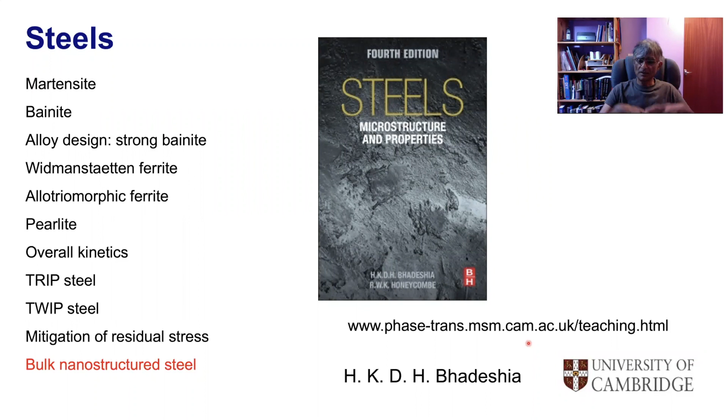This last lecture in this series of 12 deals with the design of a bulk nanostructured steel. I'll explain what that actually means. The problem is to design a bulk nanocrystalline steel which has a basket of good mechanical properties: strong, tough, and cheap enough to make massive objects.

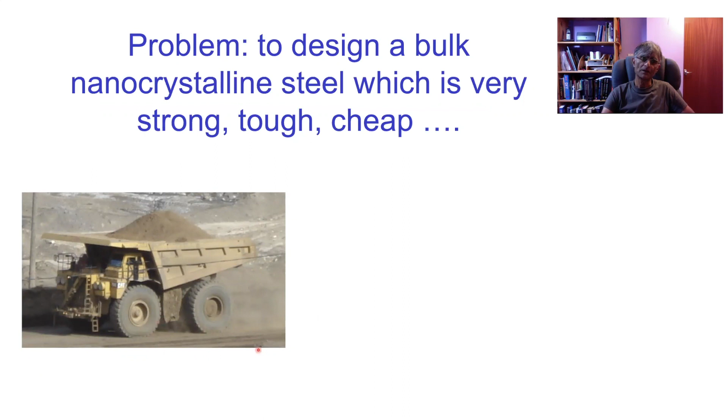By massive objects, I mean, for example, this truck, which I photographed in the oil sands mines in Alberta. If you look at the size of just the wheel, compare with, for example, my size or that of my colleagues, we are talking about very large structures which are large in all three dimensions.

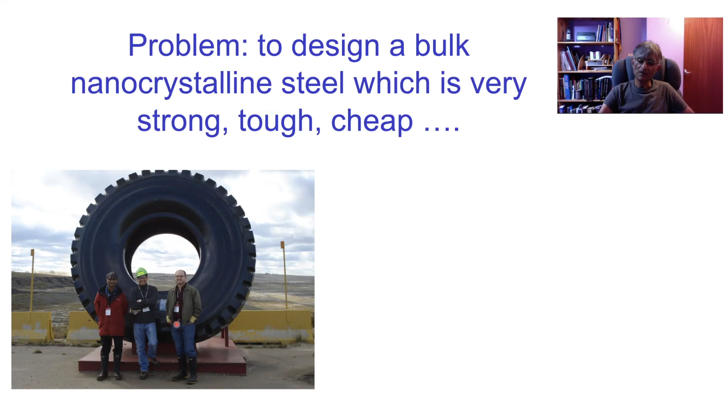Now, what do we mean by nanostructured? We want something that has a structural scale, a length scale comparable to carbon nanotubes. And what do we mean by cheap?

We must be able to produce this material at the same price as bottled water, whether we consider weight or volume, it doesn't matter. This has to be one of the most wasteful purchases anyone can make, because you're collecting water from somewhere, putting it into a plastic bottle, and transporting it from its site to all over the country in lorries. Makes no sense at all when you can get perfectly good water out of the tap in most circumstances. Anyway, that's by the way. We're after making steel which is as cheap as bottled water, because bottled water seems to be affordable.

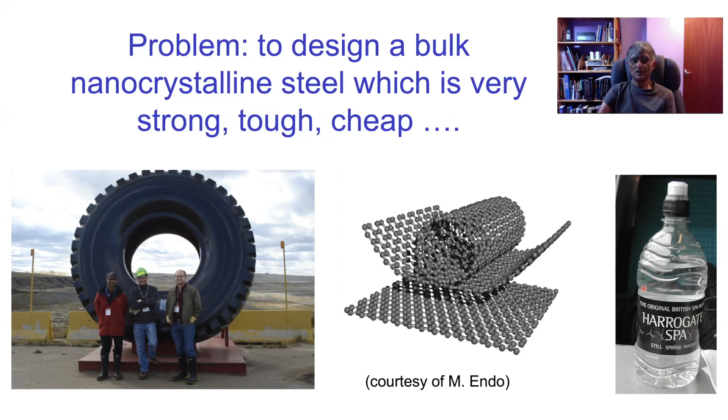Let's think about what nanostructure actually means. If I measure the grain size using a mean linear intercept, then, recalling the lecture on pearlite, the amount of surface per unit volume is equal to 2 divided by the mean linear intercept. So this plots the amount of surface per unit volume, in nanometers to the -1. A value around here corresponds to about 100 million square meters of interface in 1 cubic meter of material.

Notice that at first, the amount of surface per unit volume doesn't change very rapidly, but around 20 nanometers, it starts to rise sharply.

This trend is also reflected in mechanical properties. If you look, 20 nanometers corresponds to around 0.1 in terms of surface per unit volume here. So if I look at the strength, any grain size smaller than 20 nanometers does lead to an increase in strength, but it's not as sharp an increase as when we go from a large grain size to about 20 nanometers. So let's define our nanostructure as something having a mean linear intercept of the order of 20 nanometers. If it is greater than that, we expect to see sharp decreases in strength levels.

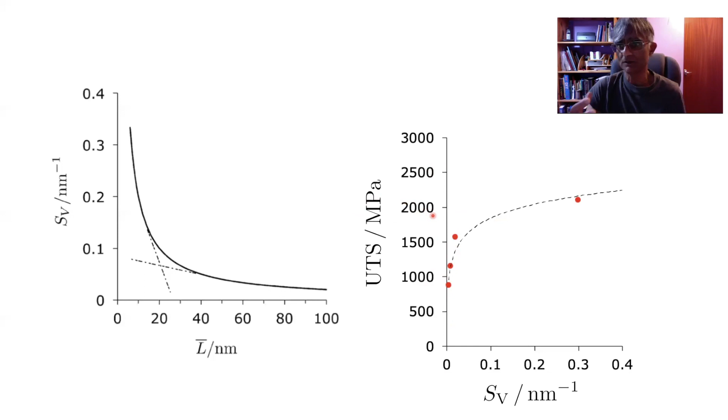Now, we're already talking about very large numbers. So 2,000 megapascals is 2 gigapascals, and it's hard to grasp the meaning of these very large values of strength. I'm going to illustrate what that means.

An apple has a weight of approximately 1 Newton. A Newton is a force, and a weight is a force. So if you put an apple on 1 square meter, you're experiencing on this square meter a stress of 1 Pascal. So 1 gigapascal means this is able to support the weight of 1,000 million apples.

Incredible, really. So we sort of glibly talk about strengths of 100 megapascals, 1 gigapascal, 2 gigapascals. But when you think about it, those are incredibly high strengths, and that's what makes steel a very, very useful material.

Back in 1956, a strength of the order of 14 gigapascals was already achieved, in pure iron. These data come from single crystals of pure iron, and this gives you the size of those single crystals.

You can see there is a dramatic decrease in strength as the size increases. This is because, if you make your crystal small enough, it's hard to find defects in it, and defects tend to reduce the strength. By defects in this context, I mean, for example, dislocations. Once you have enough dislocations in your structure, the plastic flow stress becomes a lot less than the ideal strength of the crystal, which involves ripping apart layers of atoms.

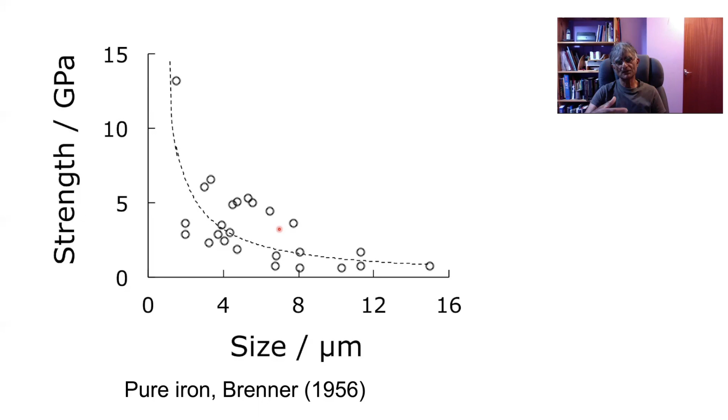Of course, there is another way of creating strong steel, and that is by severe deformation. This is a steel wire with a strength of 5.5 gigapascals, available commercially. You can see it's extremely ductile, and it can even be tied into a knot. That's better than, for example, a carbon fiber, which doesn't have this level of ductility.

The problem is that to get this level of strength, you've got to deform it so severely that there is a very large dislocation density in the material, and the coherent regions inside this wire are very small indeed. To get that level of strength, imagine you've got 60 grams of iron and you stretch it out into 2 kilometers - that's the level of deformation put into this wire by drawing.

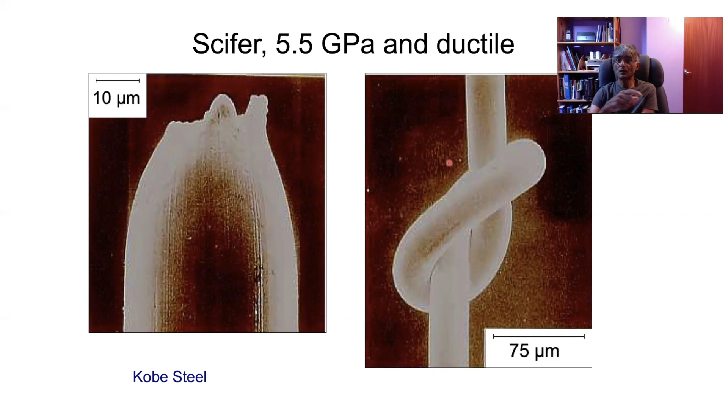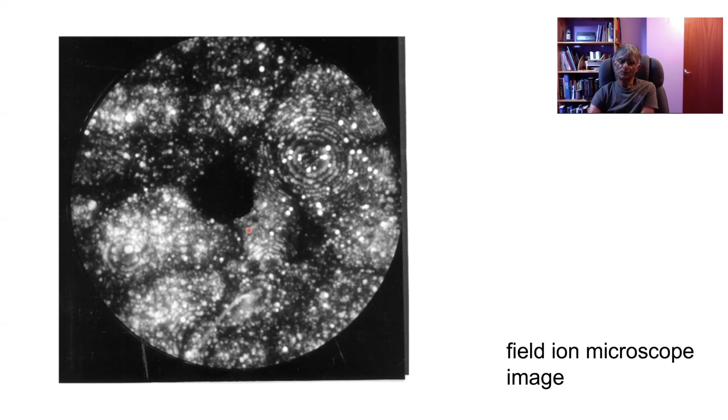So we've got to 5.5 gigapascals, which is 5.5 billion apples on 1 square meter - really astonishing strength. Now, if I compare this wire against the single crystal where the strength drops dramatically, this wire is insensitive to size simply because it acquires its strength not through perfection, but by having lots and lots of dislocations inside the material.

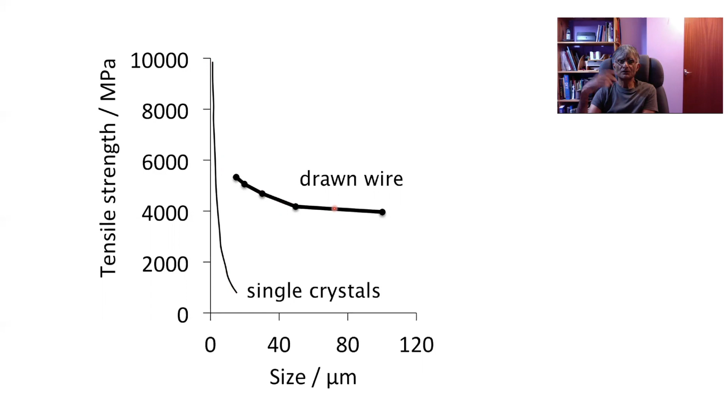The problem is that when you have to put in so much deformation, you end up with an extremely thin wire. To illustrate how thin that is, if you look at men's socks or women's stockings, the definition of that thread is in terms of a denier, where a denier is the weight in grams of 9 kilometers of fiber. Women's stockings tend to be about 10 denier and men's socks about 50 denier.

Now, the steel wire I just explained is 9 denier, so it's finer than the thread in women's stockings. This means it becomes very expensive, and it cannot be classified as a bulk material because you can't make large objects with it. You can't weld it either, because that would destroy the structure.

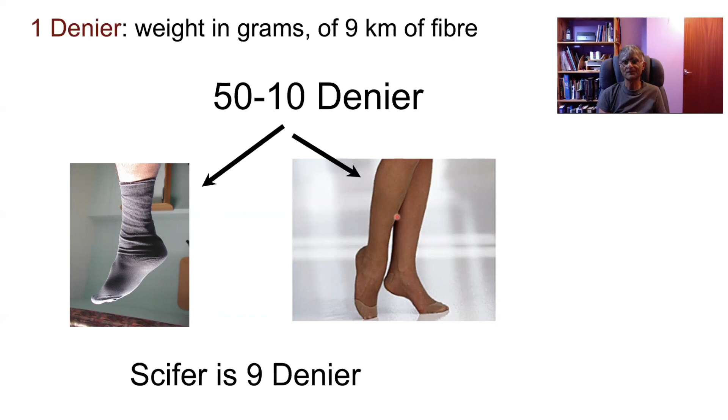Let's move on. This is a carbon nanotube with a particle of iron in it. When this became a story, there were articles, for example in Acta Astronautica, where the strength was reported as 130 gigapascals, which corresponds to the strength of the carbon-carbon bond.

In recent years, people have been talking about graphene being the strongest, but actually you could get a strength of 130 gigapascals in carbon nanotubes. The reported strength of graphene is of this order, or very close to this number.

The reason this was reported in Acta Astronautica is that the idea was to build a space elevator with a carbon nanotube rope that is 100,000 kilometers long. Because it would be light compared with any other material we know, it could support its own weight, whereas if you tried to make it out of steel, that would not be possible.

It also has a modulus along its length which is roughly 6 times that of steel, so that's very good for a rope.

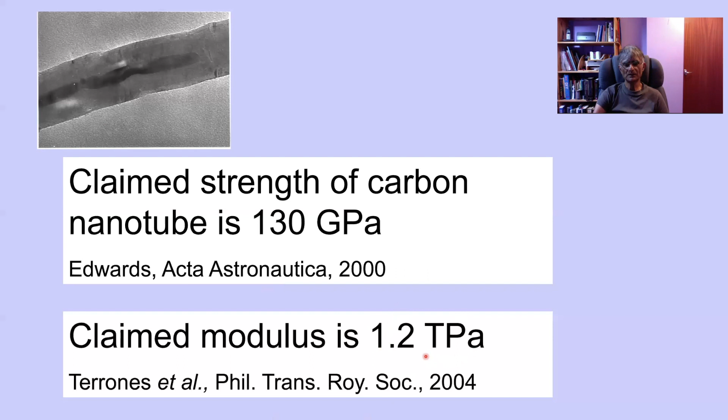If we look at some basic thermodynamics of defects, this term here, where we have small n, is the number of defects, and this is the cost of creating a defect - this opposes the formation of a defect. On the other hand, when you take a perfect crystal and introduce a defect, that increases the number of ways in which you can arrange the defect on the lattice, and therefore you increase the entropy - this is the configurational entropy, and this term will favor the formation of a defect.

So if you differentiate this equation with respect to the number of defects and set that to 0, then we get an equilibrium number of defects - and I emphasize the word equilibrium - at any temperature and in any material.

That equilibrium number scales with the total number of atoms in your system. So what this means is that once you start scaling up the size of your object, you will have an increasing number of defects in that object. That's what thermodynamics tells you. You can't get rid of them.

This is why we can get diffusion of atoms through a metal, for example, because there are vacancies, and the vacancy concentration—if you set this to the free energy of formation of a vacancy—represents the concentration of vacancies. Now, this equation tells you immediately why you cannot get the strength levels reported for carbon nanotubes when you make them larger.

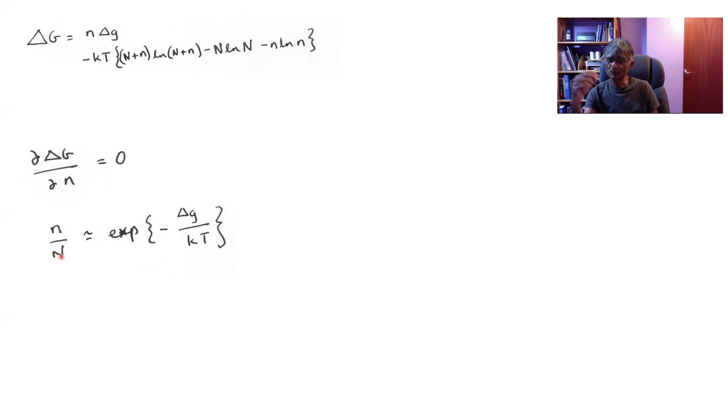So if I show you some data here, the strength collapses, okay? Collapses even when you get to a length of 100 micrometers, let alone 100,000 kilometers.

And exactly the same principle applies to graphene. It's complete nonsense to talk about the strength of graphene being 200 times stronger than steel. It's only 200 times stronger, as are carbon nanotubes, when the size is incredibly small, okay? Because you are relying on the carbon-carbon bond, not on defects, and defects will be there as soon as you scale it out, okay? And of course, the strength of graphene and of carbon nanotubes is highly anisotropic.

So the same reason which we knew in 1956 is that the strength of whiskers decreases with size. That should have been a lesson for people working on carbon nanotubes and graphene when they talked nonsense about the strength of the material and what could be made with it.

So the strength of a nanotube rope, about 2 millimeters long, is less than 2000 megapascals. So I wrote this up and sent this article to NASA, who were sponsoring a $17 million project on the space elevator. And you no longer hear about the space elevator being made of carbon nanotubes or anything else for that matter.

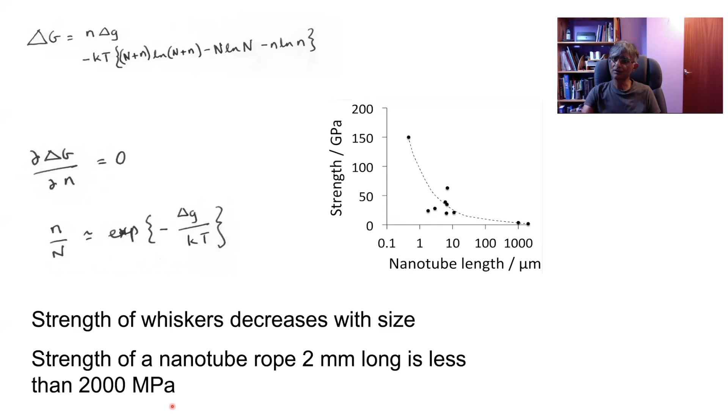Actually, the idea for the space elevator comes from Russia, a Russian comic from many, many decades ago. Very imaginative—yeah, you don't have to launch rockets, you can simply climb up the rope.

So strength produced by deformation limits the shape, and the shape may be in the form of wires or very thin sheets because you have to deform a lot. And strength in small particles relies on perfection and is doomed as size increases. We've known that for more than half a century, and yet people just do not learn that lesson when they make awful claims about the properties of small samples.

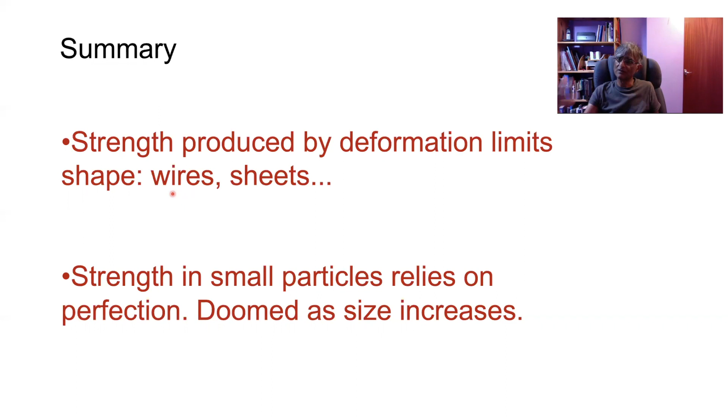Now, there is a process which has been incredibly successful in mass producing steels. It's known as thermomechanical processing, where the steel is hot deformed in the presence of very small particles of carbides, which limit the growth of the austenite grains, and therefore you can end up with very fine ferrite grains.

So let's see if that process, which definitely is a bulk production process and produces steel samples which are very, very large if you want them to be large, and ask: what is the smallest size that could be produced by thermomechanical processing?

This is a grain structure, and I explained to you in an earlier lecture on pearlite that the cost of creating these boundaries is the surface per unit volume times the interfacial energy, a grain boundary energy in this case. So if I multiply these two, I get 2 sigma over the mean linear intercept as the cost of creating these grain boundaries. And that cost has to come from somewhere, okay? It's provided by the free energy change from austenite to ferrite.

So we can calculate the free energy change using thermodynamics and set it equal to this. And then we have a relationship between the smallest possible grain size that can be produced for a given driving force of transformation—in other words, a given undercooling below the equilibrium temperature.

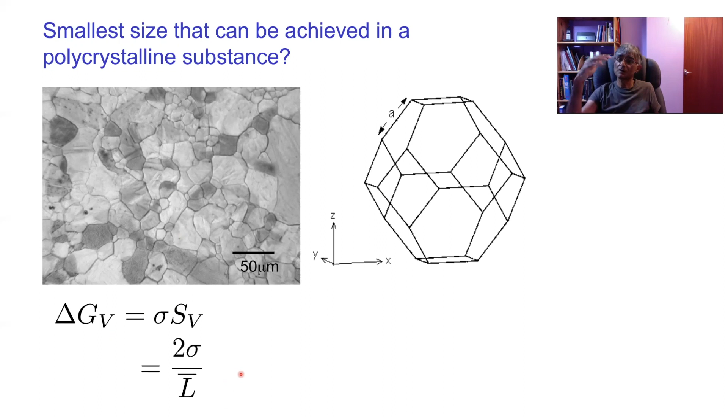So here is the curve showing how the minimum size that could be produced depends on the free energy change. We would have to undercool to get a size of 0.01 micrometer, which would be very impressive. But it turns out that a large amount of investment to look at this problem never managed to produce a ferrite grain size smaller than 1 micrometer.

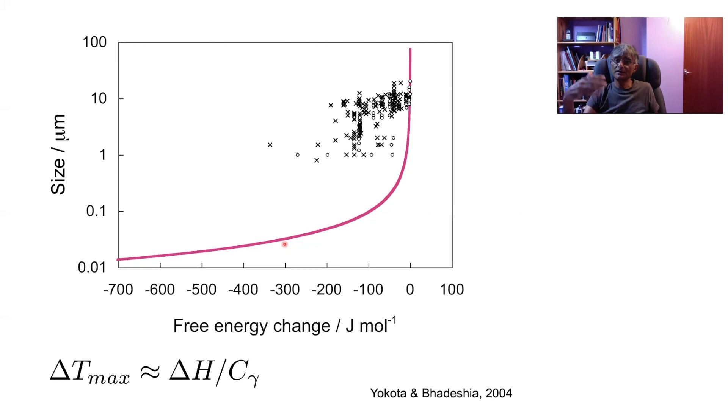Now, the reason for this is that when we undercool, the enthalpy change of transformation also increases. And furthermore, the rates of reactions can sometimes increase. So the heat of transformation basically removes the undercooling—it heats up the steel. And when we take account of that, it isn't very likely that we can produce nanostructured steels using the hot deformation method.

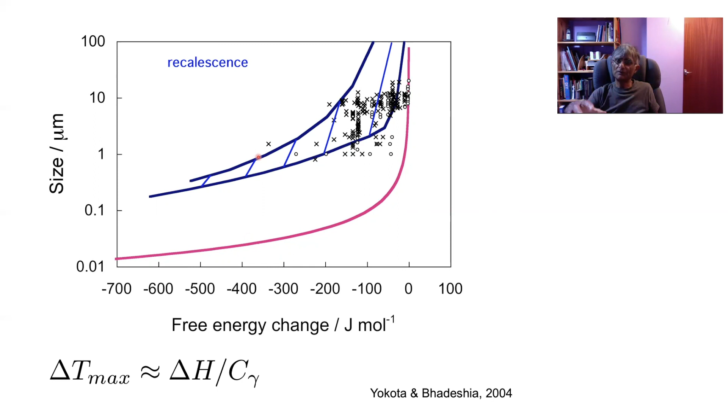This enthalpy release is known as recalescence. It heats up your material simply from the enthalpy change of transformation. So in summary, thermomechanical processing is limited by this recalescence, the release of the enthalpy of transformation. So we need to do something to help. We need some mechanism of storing the heat inside the material.

Think about it, when we were talking about displacive transformations, the amount of stored energy due to the shape deformation in the case of martensite was 700 joules per mole, which is very large. If I go back to the previous slide, you can see that's a large amount of energy you would consume in creating the elastic strains around martensite.

We could also reduce the rate of transformation to allow any enthalpy to dissipate. And transforming at a low temperature is always a good thing because it increases the nucleation rate. I mean, that's an exaggerated statement because if you go too low, you might actually decrease the nucleation rate. But generally speaking, you will get finer structures when you transform at a lower temperature.

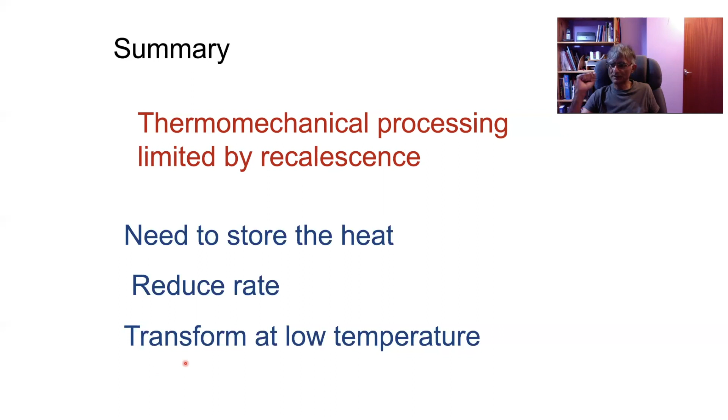There's one more problem. These are experiments reported on interstitial free iron, where if you look at a grain size of 2 micrometers, we have a strength level there, but lots and lots of elongation. But if you decrease the grain size by an order of magnitude - not nanostructure, just small - you get a rapid plastic instability, so there's almost no uniform elongation.

The reason for this is when you make the grain size small, the defects sink into the grain boundaries. Once that happens, there's no work hardening mechanism, and therefore you get rapid plastic instability. When the grain is large, you have the dislocations moving about inside the grains, and therefore you delay your plastic instability by work hardening.

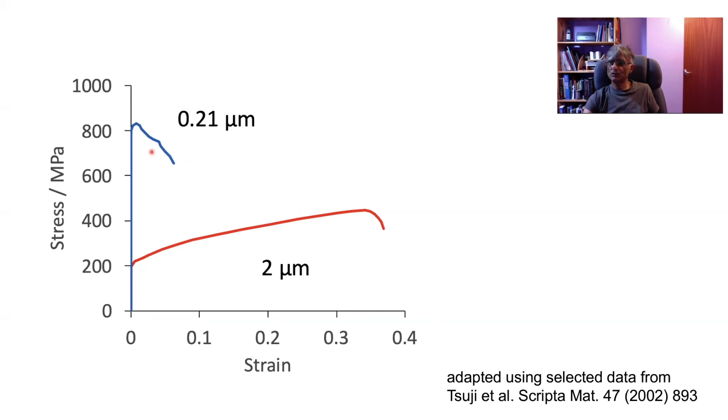But at fine grain sizes, you lose that ability, and therefore you get an early plastic instability. So the fourth condition is that we must have a mechanism of introducing a work hardening capacity. At this point in the lecture, I ask the students, how would you increase the work hardening capacity? Because we've done it already - with the TRIP steels, for example, where a small amount of retained austenite in the microstructure transforms at stress concentrations and gives work hardening, and therefore we get a large elongation in spite of an increase in strength.

So in summary, if we choose a displacive transformation, then it would have to be bainite, because we are talking about the ability to produce large samples which you cannot uniformly quench without adding huge quantities of alloying additions. And we need to avoid distortion associated with rapid heat treatment. The work hardening capacity, if we choose bainite, would come in from the retained austenite if we add silicon to our alloy.

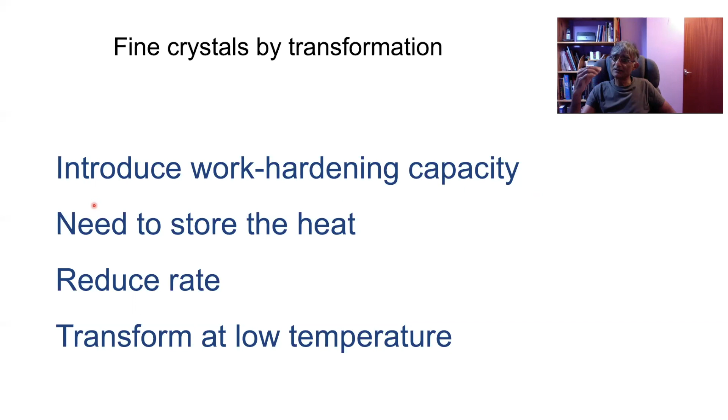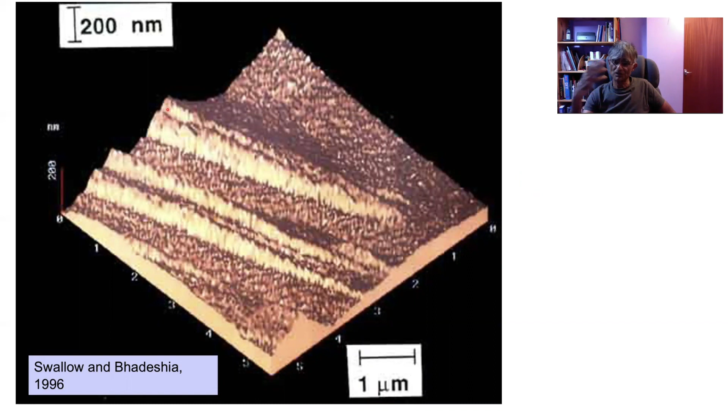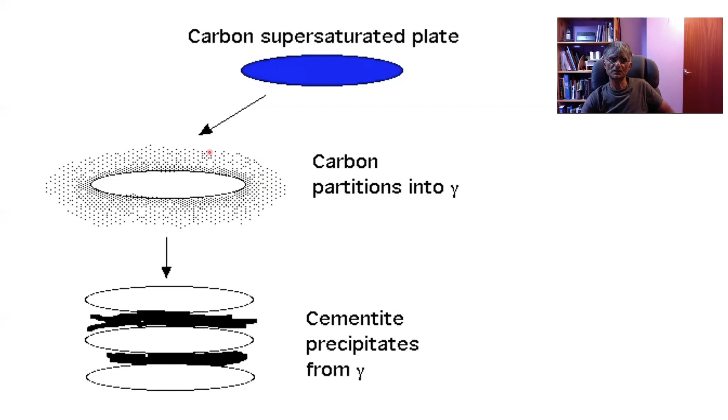This is the shape deformation due to the bainite transformation, and it introduces a stored energy term of the order of 400 joules per mole, which is quite large. And as I said to you, we will cut the reaction off at this point so that we end up with a mixture of carbon-enriched austenite and bainitic ferrite plates.

I showed you this microstructure, which is beautiful, with these fine platelets of bainite and bainitic ferrite and retained austenite in between. But this is not a nanostructure - each of these plates is about a quarter of a micrometer in size, and it's transformed at around 400 degrees centigrade. So we need to suppress that transformation temperature.

So you can ask a fundamental question: what is the lowest temperature at which I can get bainite? We can do those calculations. I haven't explained to you how to do that, but I explained to you how to do the martensite start temperature calculation using thermodynamics, etc. And we have the theory for the bainite reaction.

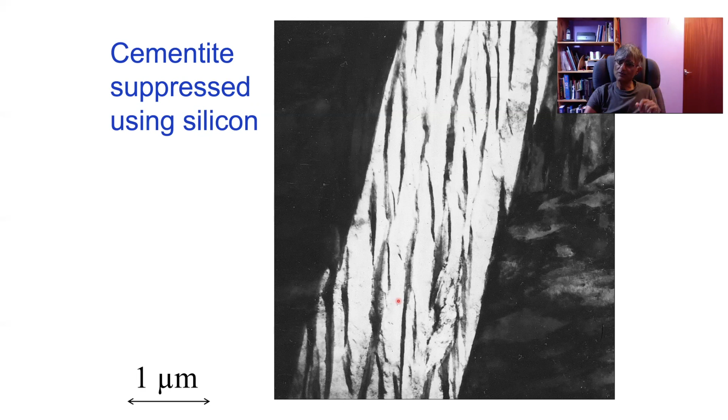When we apply the theory, it's actually quite surprising that as long as you can keep the bainite and the martensite start temperatures separated, you can suppress the bainite start temperature to room temperature. So you can actually form bainite at room temperature in this alloy and this sort of carbon concentration. Very surprising, but there is nothing to say that this is wrong.

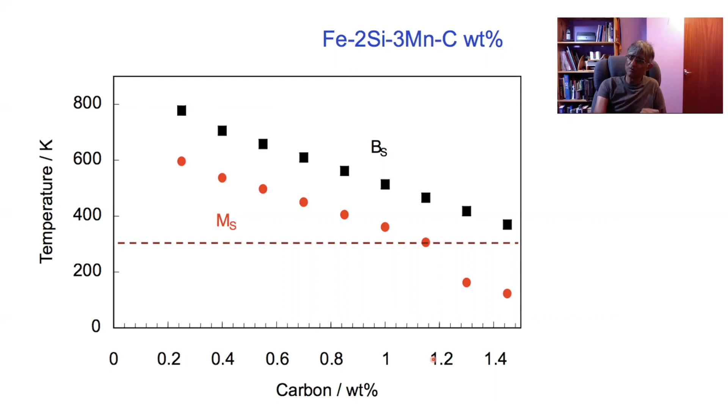There is a spanner in the works, and that is that the kinetics of reaction becomes slower as you suppress the transformation temperature. That is good as far as the dissipation of heat is concerned. But at this carbon concentration, it would take a century for bainite to form. So you could make the steel and leave it for a century, just like wine in a cellar, and it would appreciate in value, and later on you might be able to sell it.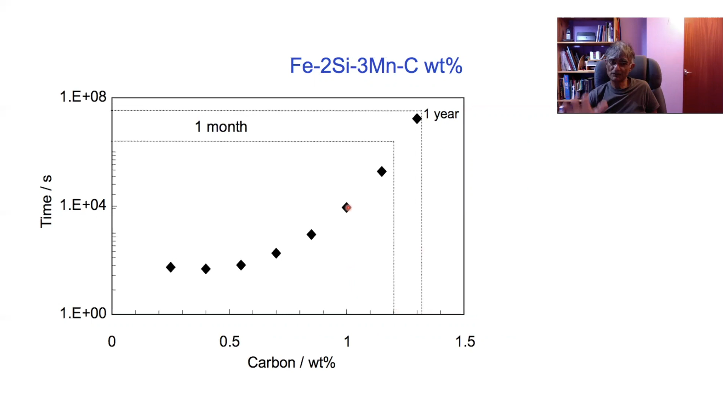But unfortunately, we don't have that patience. So we make an alloy which will transform in about 10 days of isothermal heat treatment at about 200 degrees centigrade. So we've achieved the low transformation temperature by having a carbon concentration of 1 weight percent.

This is to suppress the cementite, hardenability. We want to make large quantities of this material, so it will inevitably contain impurities which segregate to the austenite grain boundaries, for example phosphorus. And we do not want that, because strong steels become brittle at the boundaries if there are impurities. The addition of molybdenum cures that problem by gettering the phosphorus, and this is again a hardenability addition.

Now it's a fairly simple alloy, and we've got enough hardenability to avoid pearlite and ferrite in a large chunk of material, with a reasonable transformation time. So 10 days at 200 degrees centigrade is perfectly reasonable. It's like putting the steel into a pizza oven. It's not expensive, and we've got rid of cementite.

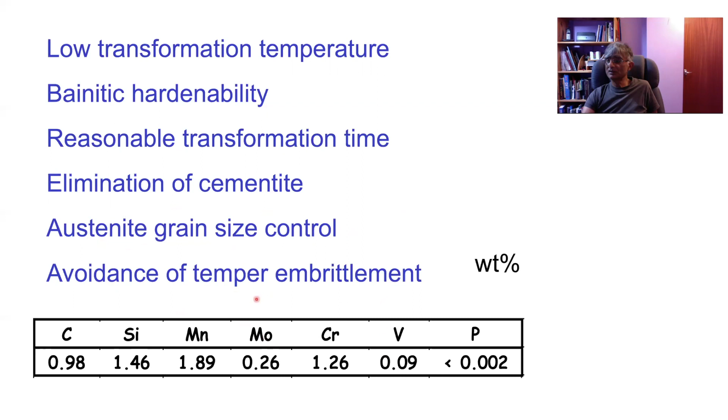Vanadium is there to form small vanadium carbides, which help to control the austenite grain size and stop it from coarsening, and molybdenum to avoid the embrittlement. The heat treatment is straightforward: you austenitize and then hold at 200 degrees centigrade for 10 days. There's no need to quench it afterwards, you can cool it slowly.

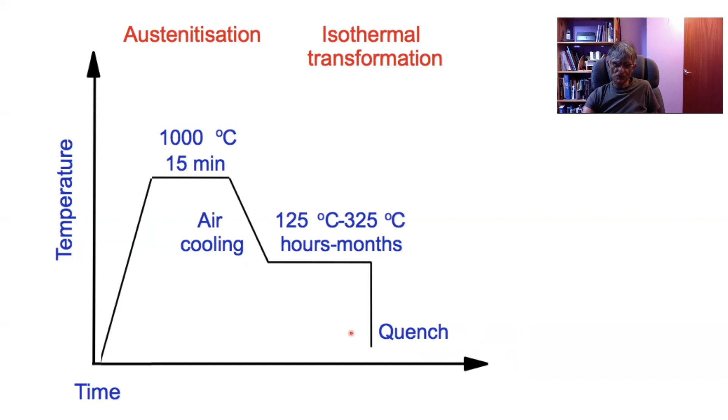So we did this, and we obtained a structure which looks like this optically. This is bainite, and the white regions are austenite, with films of austenite between the platelets of bainite which you cannot see. On its own this doesn't look remarkable, but I want you to note that this structure is effectively isotropic, because I'm going to show you a very high magnification image of one of these regions, which can be completely misleading.

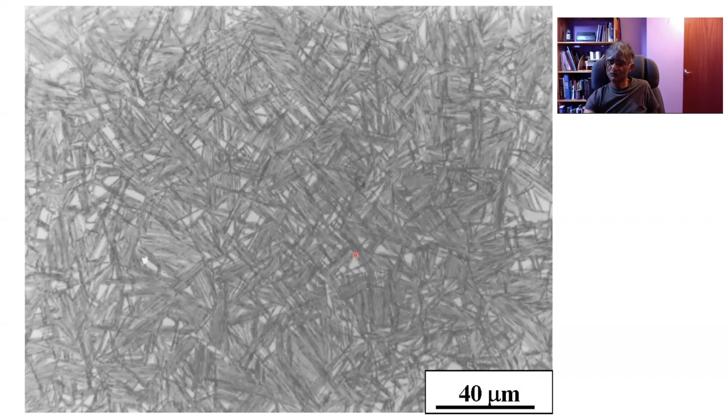So this is the breathtaking transmission electron microscope image showing the platelets of bainite and the carbon-enriched retained austenite. This scale here is 20 nanometers, so these are approximately 20 nanometers wide, finer than this carbon nanotube at the same magnification.

It's remarkable, actually. Now you may argue that, okay, these are long, but the mean free slip distance in a plate is twice the thickness. If you do a stereological analysis for the mean free slip distance, because slip in the plane of the plate is very unlikely, then it's twice the thickness.

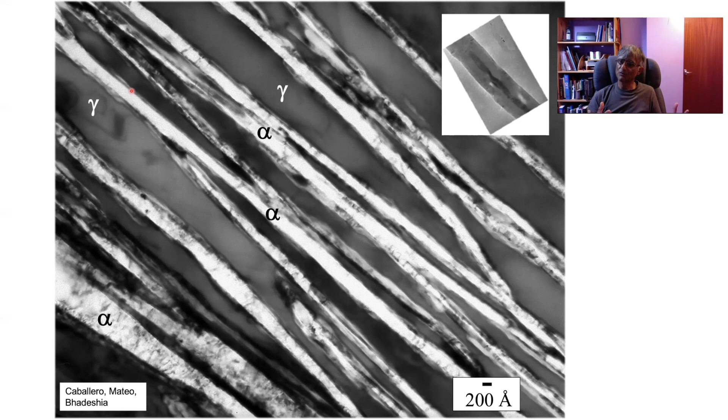So we've achieved an incredibly fine grain size purely by phase transformation, which has an isotropic structure, and there's no rapid cooling involved in this process, so you don't have the distortion. And sure enough, you get work hardening, and depending on your transformation temperature, you can control the strength. This is about 2 gigapascals and about 25%, let's say 22%, elongation.

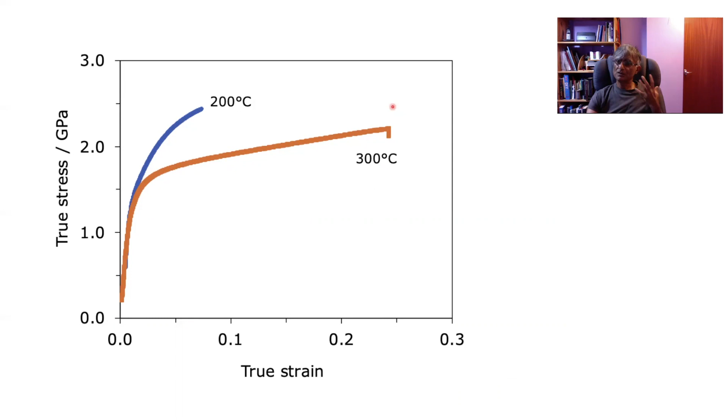Now, the temperature of transformation is a quarter of the homologous temperature. That means the absolute temperature divided by the absolute melting temperature. So it's a remarkably low heat treatment temperature. And what this means is that the diffusion distance of an iron atom in 10 days at 200 degrees centigrade is unphysical - it's 10 to the minus 17 meters if you calculate it.

This transformation can only happen by a displacive mechanism - that's obvious, okay? And we have achieved an incredibly fine structure, finer or comparable to a carbon nanotube. And this is actually very hard, because we have 100 million square meters of bainitic ferrite-austenite interfaces inside our structure, and those are strong interfaces because a dislocation would have to traverse into a different lattice, a different crystal structure.

There are no carbides, and it's designed using nice, neat theory. Okay, so the properties are impressive. And in the Cavendish laboratory, they did very high strain rate experiments.

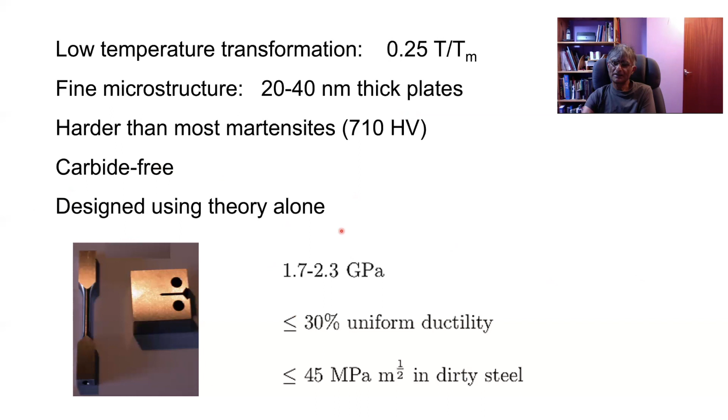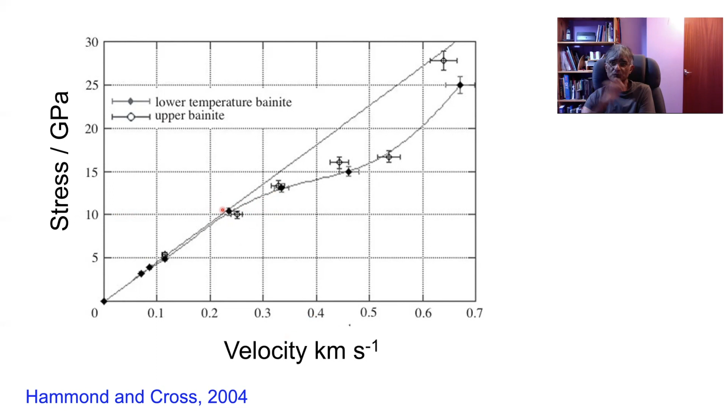And this is an armor test.

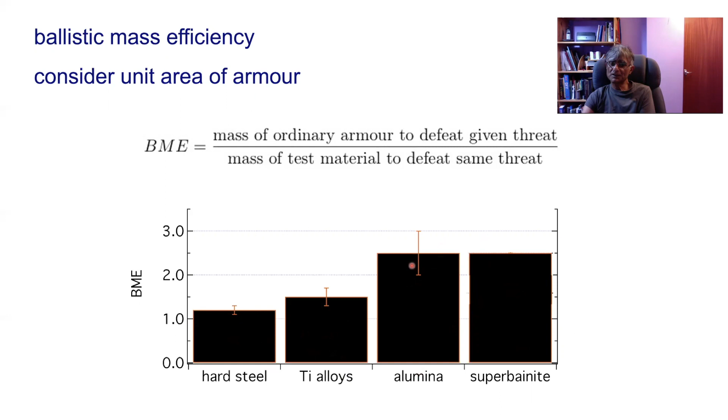Here is the structure of a civil aircraft engine, and this is the steel shaft that transmits the torque to the fan blades. We would like to make this out of nanostructured bainite, and these are actually blanks of nanostructured bainite for prototype shafts by Rolls-Royce. Just think, these are very large.

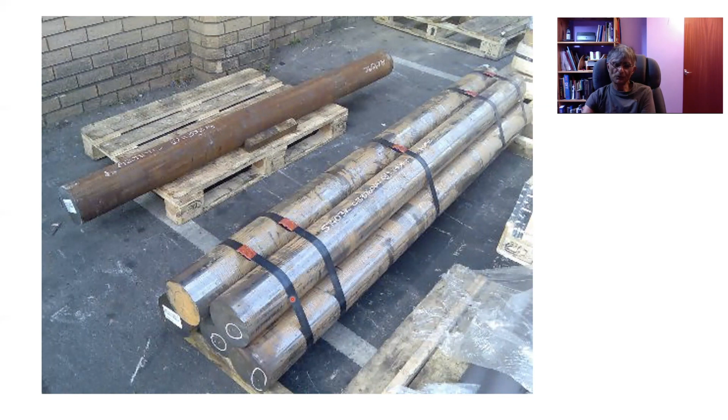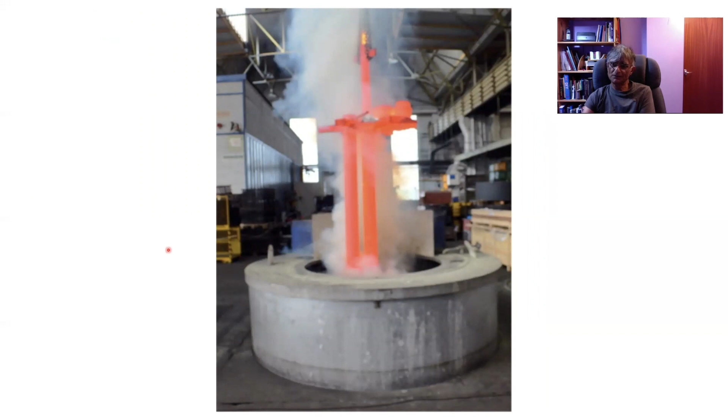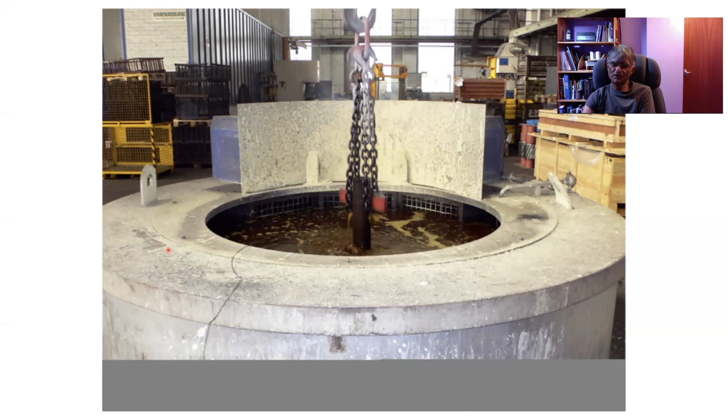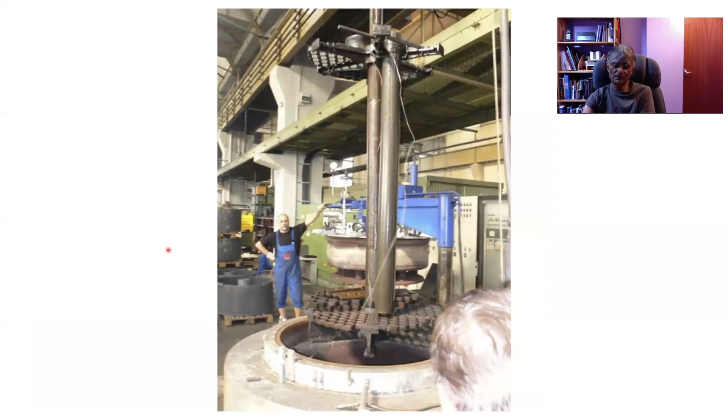The diameter is about 150 millimeters or so, and the heat treatment is: you austenize it first, remove it from the austenizing furnace, and put it into a salt bath at the appropriate temperature, this one at 200 degrees centigrade. But you don't want to leave it in there for 10 days because this is expensive kit, so you take it out and put it into an oven at 200 degrees centigrade. Here are two of these shafts heat treated, and they have this structure throughout.

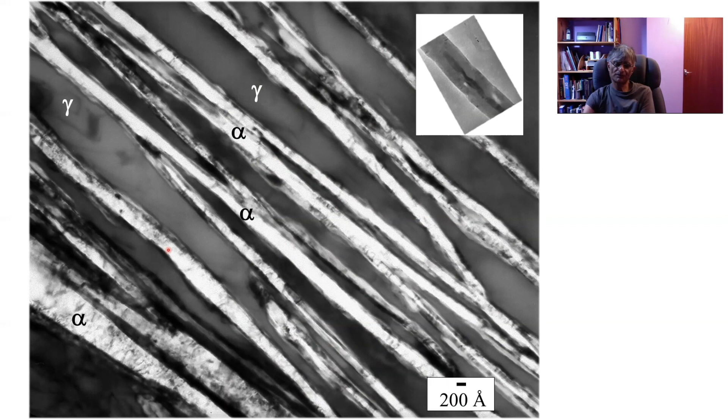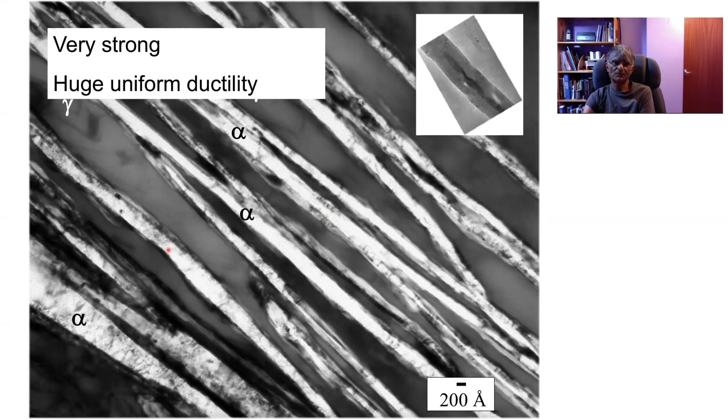Uniform hardness through the section, so this is very strong. It has significant uniform ductility, I showed you some tensile properties. We do not require deformation to produce this structure. There's no rapid cooling necessary, so you avoid problems of distortion and no residual stresses built in from the cooling process. And you saw the chemical composition is not particularly expensive, and we can get uniform properties.

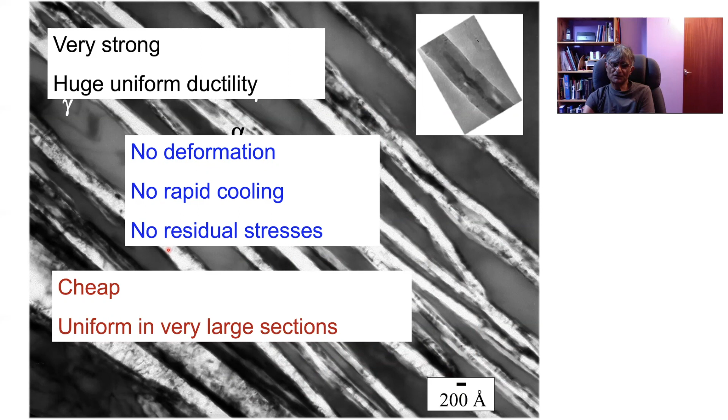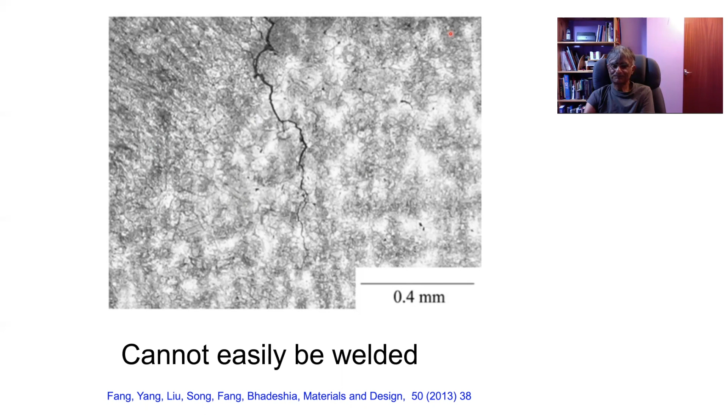I want to finish off by telling you some disadvantages of nanostructured bainite. I've talked about shafts, bearings, armor—none of those require welding. If you try to weld this, it will crack spontaneously in front of your eyes because we have about 1 weight% of carbon. So applications are limited to scenarios where you do not need to join the material. There's another story I can tell you in the future of how to solve this problem and yet get properties the same as the nanostructured bainite, but that's another story. Now, I mentioned that if you have this sort of carbon concentration, it's going to take 100 years to produce bainite.

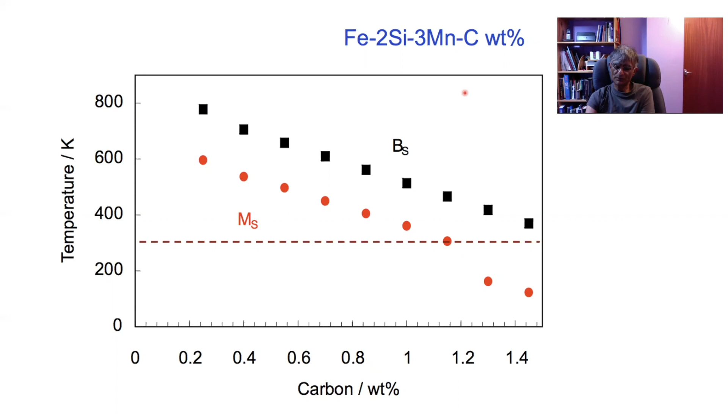But we nevertheless made this material. It has 1.75 weight% carbon, with similar manganese and silicon concentrations, and it looks like this. It ought to transform at room temperature in 100 years. This experiment was started in 2004, and a metallographically polished but not etched sample was produced and put inside an inert gas in a sealed silica tube. There were two of these samples.

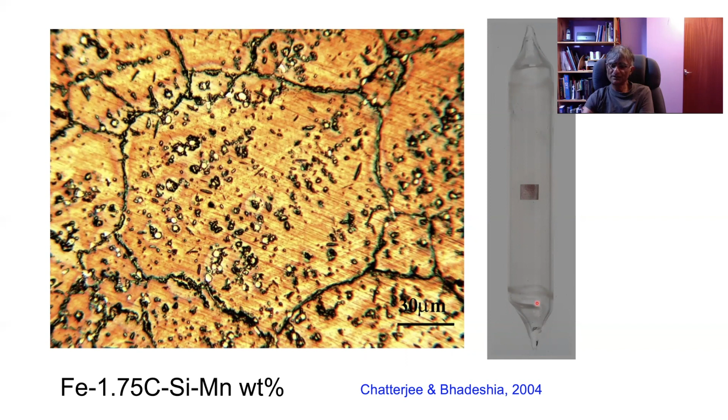One is located in the Science Museum in London, and in the year 2104 it will be interesting to see if there are surface displacements produced by the formation of this bainite. Unless the biologists do something miraculous, I won't be around to see this result, but I expect you and your children and your grandchildren to have a peek at the Science Museum in the future. So pass on this story.